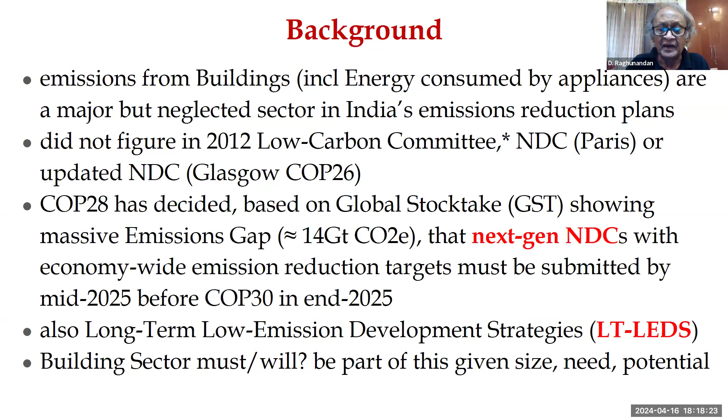But since we are required to now submit economy-wide emission targets, it's very likely that we are going to submit an expanded list of emission reduction targets next. And I can't see that we will be able to do that without taking the building sector on board, because buildings is a major part of the emissions profile of the country, which is currently about 25% of total emissions.

And this is in a context where roughly between 50 to 70% of building stock by 2050 is yet to be built. So more than double of the building stock today is still to come up. And we are already 25% of the total emissions in the building sector.

And I've given some figures here of emissions from buildings, which are largely drawn from C-STEP's study and their modeling, which essentially says that almost the entire carbon budget, that is the amount of carbon India has between now and 2050, the space in the atmosphere, will be used by the building sector alone. Or since it will not be, that means we'll exceed our carbon budget by a lot. And that's clearly not going to be allowed and will not be countenanced by the international community.

So when we talk about the building sector, I just want to emphasize that the building sector emissions consist of two parts. One are what are called embodied emissions. That is, emissions contained in materials that go into buildings, into cement, concrete, etc. And emissions which have gone into the construction industry, the transport of these materials, the removal of waste and the handling of waste and so on. These are called embodied emissions.

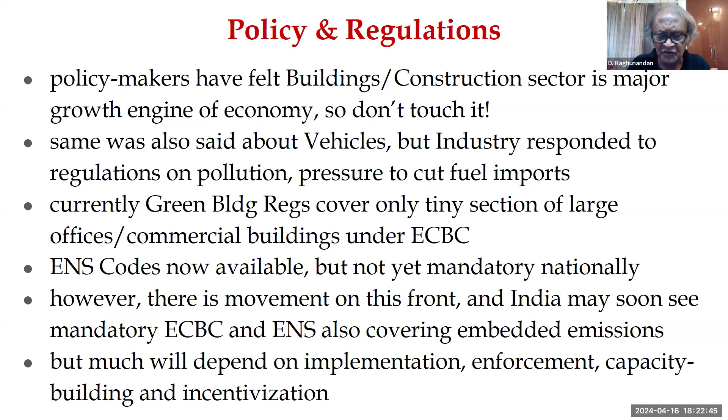Chitrakshi, yeah. So just a few questions I'll leave you with. Should energy efficient buildings also be included in India's next submission in our nationally determined contributions? Should ECBC and ENS be made mandatory? And if not, how do we go about implementing it and achieving the results that we want? What kind of policies, what kind of incentives can bring us the desired goals if we do not have mandates?

Third, which is a technical question for those among the experts who want to look at this, are there any changes that you would like to see in the ECBC codes or in the Eco Niwas Samhita codes? My next poser is perhaps a little more complex, but we have industry representatives here among us who could perhaps address this issue. Is the industry ready for this shift if this does come about?

Where do we stand with regard to that? And should this effort also involve the appliance manufacturers? Since we are talking about reducing the emissions from appliances, air conditioners, refrigerators, televisions, fans, etc., inside the building, should they not be part of this effort?

And the last two questions pertain to Chennai specifically. Is Chennai ready to implement the ECBC or Eco Niwas Samhita, given the fact that the Chennai Climate Action Plan has rather ambitious targets of addressing 40% of buildings, both retrofitted and new, by 2030, leading up to 60% in 2040 and going up to 100% later?

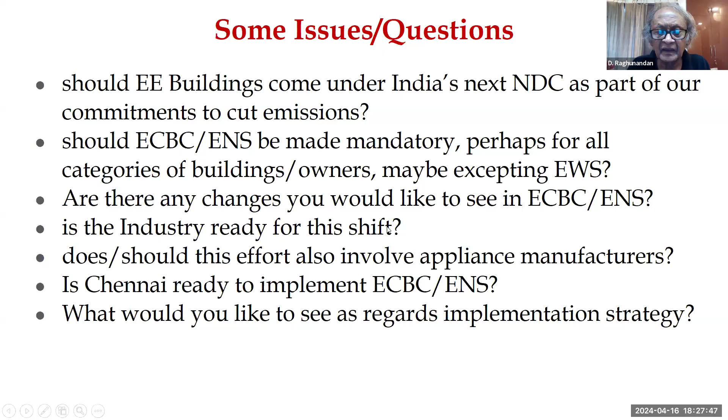Dr. Shivraj Dhaka has just joined us, so I'll ask him to make his presentation in maybe 15 plus minutes. Dr. Dhaka is part of CII and the Green Buildings Council in Chennai. Dr. Dhaka, please. Thank you very much for offering this opportunity to CII IGBC for this presentation on net zero energy buildings. I hope you are able to hear me. Yes, we are. Please go ahead.

Sir, I will share my screen so that I can also utilize some animations. Okay, then you can share it yourself. Chitrakshi, you can take down what you have uploaded and then he can do it himself. I think my screen is visible to all of you. Yes. Okay, let me also put on full screen mode. Just a second.

So this presentation is primarily about net zero energy buildings and built environment. I got a message from Raghunandan sir that I should cover several parts of net zero energy which make sense for Tamil Nadu or Chennai with regard to climate mitigation. I have tried to cover several points, but I don't think one can do justice in 10 minutes to cover every part of energy efficiency in buildings. But let me run the presentation. If you need any clarification, we can have a Q&A session.

The building you see here was the first green building in the country, and this is the headquarters of IGBC. When we started in 2001, this building was converted into green considering several measures. But in 2017-18, we realized there are many technologies and advancements available in the country, and this first green building was converted into a net zero energy building after a lot of retrofitting in the completely air conditioned system it had in 2001.

So this is the journey we have witnessed from green building to net zero energy building, and this presentation will showcase how it can become a story for every building, not only our office, but it can become a true message for every building with regard to green building to net zero.

So when we define the net zero energy building, we also defined how demand can be reduced. Even Dr. Raghunandan mentioned it could have some impact in Chennai or Tamil Nadu. So we cut down energy demand. Of course, it will have huge impact on the source energy. This means whatever energy we get from either solar or power plants, it could have a good replica downstream with regard to how energy demand can be cut down.

Then highest energy efficiency would have focus for every building during design as well as in operation. And after defining energy efficiency in every building, whatever is left out, this energy should come from renewable energy. So this is the definition IGBC has defined.

But if you see the Bureau of Energy Efficiency, which is the nodal agency for improving energy efficiency all across the country, for the building sector as well as the sectors in industry also.

Let me also turn it off, just a second.

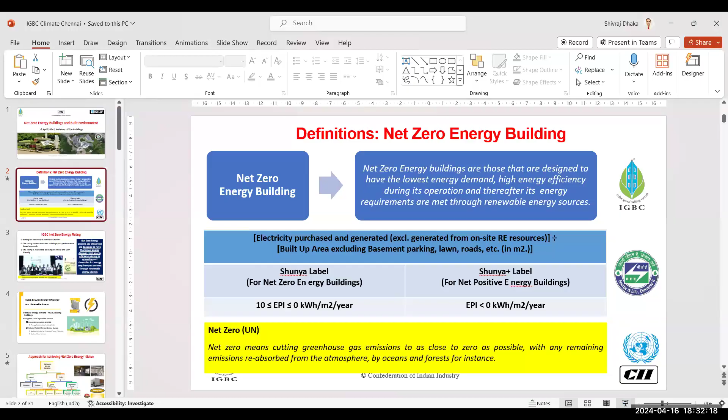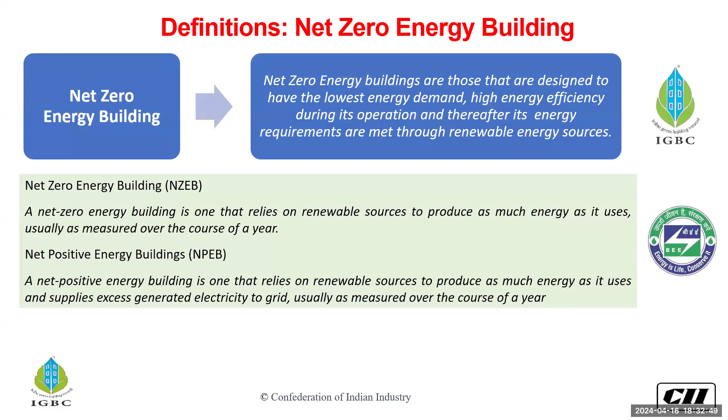With regard to IGBC and the Bureau of Energy Efficiency, we also give huge importance to energy efficiency and renewables. The Bureau of Energy Efficiency has defined what building can be called net zero, like the Shunya label for net zero buildings, and their energy performance index. Energy performance index is very simple. We take the total energy consumption for a given building and divide by the total built-up area for our home or commercial building. This should be less than 10 for commercial buildings, and for residential buildings it could be a little less than 10.

With regard to Shunya label plus, or net positive energy buildings, this EPI would be less than zero. This means whatever renewable energy we generate will completely offset the energy demand, but also generate a little more than our requirement. You can also find many other definitions. This is listed from the United Nations, but the UN doesn't talk about net zero energy. They talk about total carbon offsetting by any source of energy users.

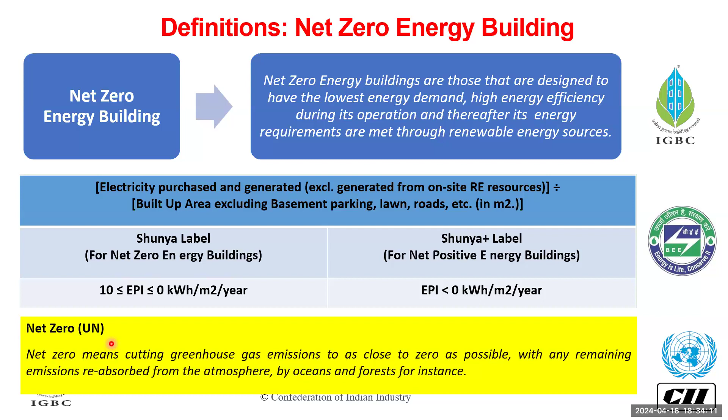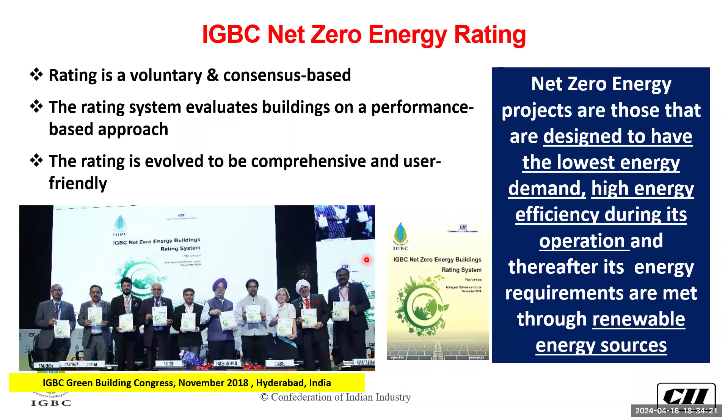So this presentation would be shared with the team so they can circulate it with all the stakeholders. This net zero energy rating was launched in 2018, and today we have many projects all across the country. I will also showcase some case studies during my presentation.

So when we defined net zero energy, our thought process was that it should also address several policies in the country. Primarily, when we talk about net zero energy, we are also talking about energy efficiency and renewables. Energy efficiency is well defined under the Energy Conservation Act 2001. Later on, ECBC, the Energy Conservation Building Code, was developed in 2007. 2017 was the first revision.

I'm happy to mention that ECBC has now been further updated and is called the Energy Conservation and Sustainability Building Code, ECSBC. ECSBC will not only address energy, it will also address water, building materials, indoor environment quality, commissioning of equipment, and how sustainability can be achieved through site selection and planning. So all these parts of green building will also be part of the ECSBC, which will be revised very soon by the Government of India.

The second part is it addresses climate policies on energy efficiency as well as renewable energy. So while adopting net zero energy, we are really confident about having huge benefits with regard to energy savings and more and more penetration of renewable sources in every building typology.

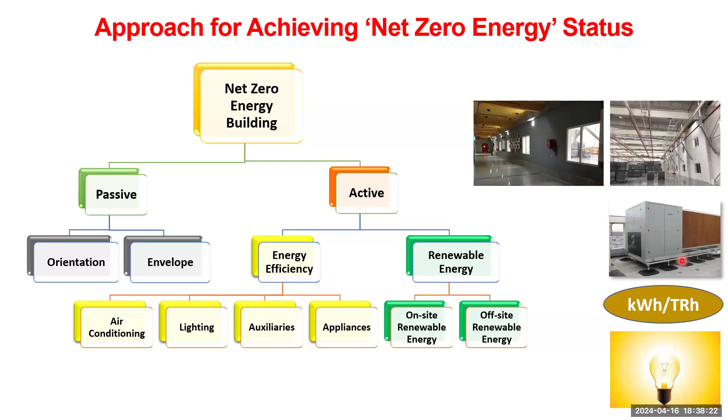So when we have a net zero energy certification, we consider several parts, and passive is by default integrated for new buildings, but primarily when we see the building growth, even Dr. Raghunandan mentioned what could be the strategy for 2050. So today we have fewer new buildings and many more existing buildings. So there could be huge retrofitting opportunities for these buildings to become and demonstrate net zero energy.

So we give more than 75% of weightage to energy efficiency alone, because energy efficiency pays back from day one. And then we also try to fit which retrofitting options can be better for the project. I have showcased something here. Many a time, old buildings do have centrifugal fans. And today, most of the air distribution systems wouldn't have a centrifugal fan.

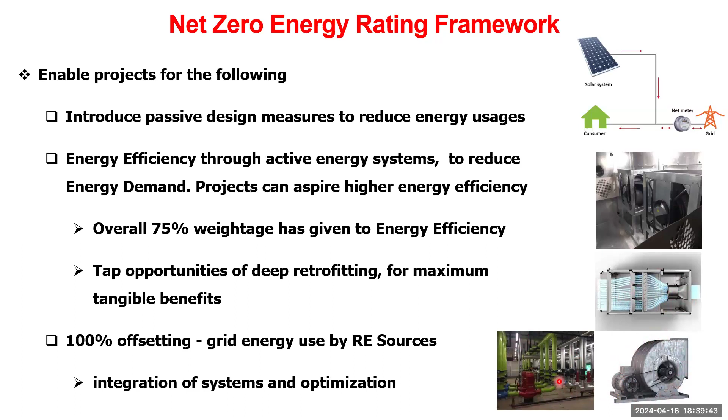Let me tell you how energy efficiency happens, which has the highest weightage in net zero energy. Some of the buildings we have rated had a very high energy performance index in 2010. They did gradual improvements. Slowly they had many retrofits, and today their energy performance index is less than a triple digit, which is like 90 kilowatt-hour per square metre per year or less.

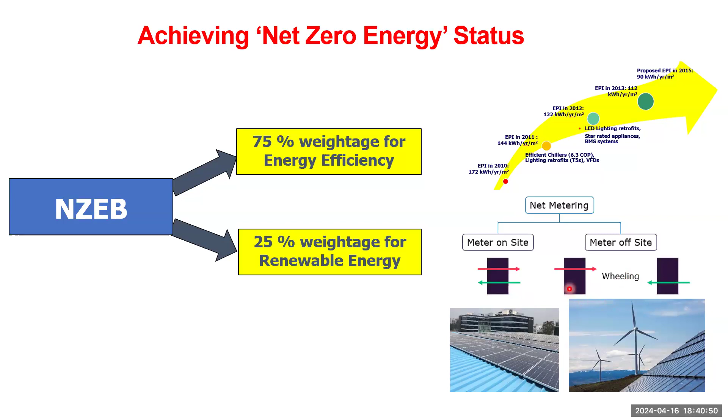Another message we would like to give you is that for renewable sources, it is not only 25% weightage; renewable energy is 25% of the overall 100-point scale. But a project must offset 100% of the grid energy used with renewables. It can be on-site, having net metering policies. Tamil Nadu is a good state with regard to solar policies. And second, if energy demand is so huge it cannot be met on-site, it can also be off-site by having wheeling.

This is ECBC, which defines the compliance route, like building envelope, comfort systems, lighting, and electrical and renewable systems. These have a compliance route with regard to mandatory conditions, and if mandatory conditions are met and the project has more energy efficiency, they can also demonstrate it through the energy performance index, which I will discuss in coming slides.

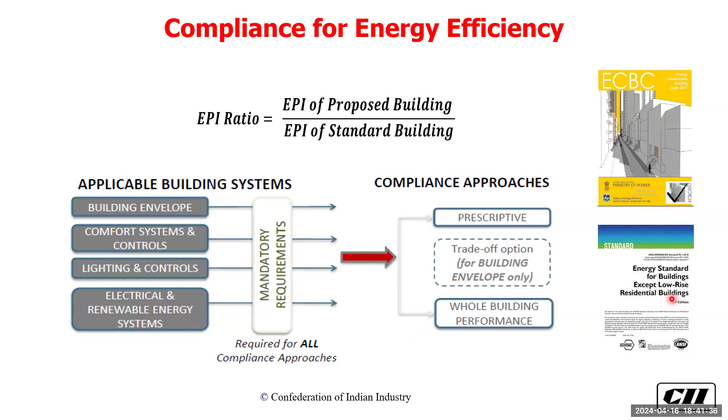Some projects that are really interested to cross some milestone beyond ECBC can also refer ASHRAE 90.1. Some of the latest versions, like 2022 or so, define really ambitious goals for energy efficiency.

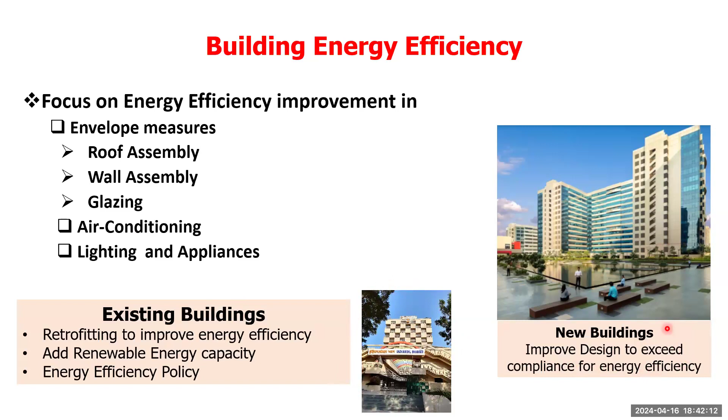So when we talk about energy efficiency, of course, there are parts like roof, wall, glass, and then air conditioning, lighting. But the key thing is when we have more existing buildings, there would be more energy efficiency implementation opportunities through retrofitting, and also to add capacity of renewable sources there. When we compare new buildings, obviously there would be more design interventions there, and these buildings also showcase how they are better compared to new buildings which are not meeting the code compliance.

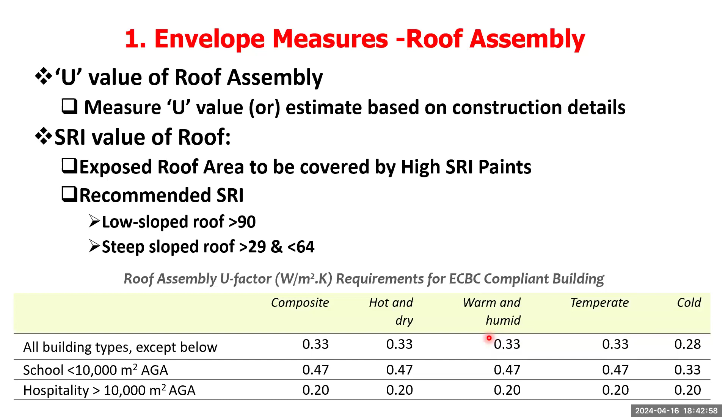So these are the envelope assembly values with regard to overall heat transfer coefficient. These values are defined there, but Chennai comes under warm and humid climate. So it is suggested to use some of the walling assemblies, some of the material which can reduce the overall heat transfer coefficient, or in very simple language, we should provide a wall which has an optimum level of insulation, and this insulation can be created by many different options. Sometimes you don't need to use insulation, it can be an air cavity. Sometimes an air cavity can be combined with some different type of insulation material which are well known in every climatic zone or city.

This is air conditioning. Air conditioning plays a very important role because in every commercial building, and in every residential building as well, it consumes most of the energy. It is said most of the time it consumes more than 50 to 55% of energy in every commercial building. And in the recent trend, it is really high in residential buildings also. These are the performance levels defined for air conditioning efficiencies in commercial buildings.

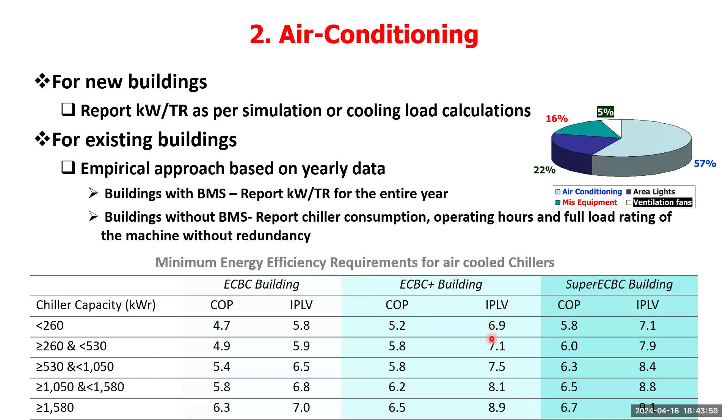So we have three approaches. One approach is called ECBC, which is mandatory for every building type. And while going for ECBC, either you follow the COP or you follow the IPLV. IPLV stands for Integrated Part Load Value. Most of the time we design for worst conditions, but the worst doesn't come every time. So we should design buildings for part load efficiencies also, so that we get more benefit from the cooling savings.

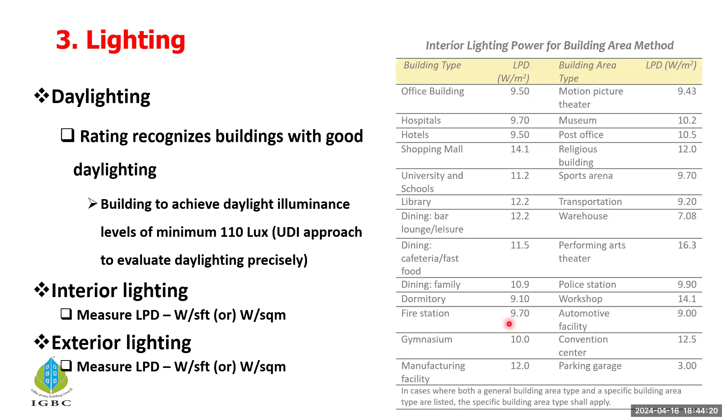Another part is lighting. Lighting is important because every space needs either artificial light or daylight or a combination of both. So we recommend lighting power density, which is defined for different building typologies in ECBC. It is available online for everyone to refer.

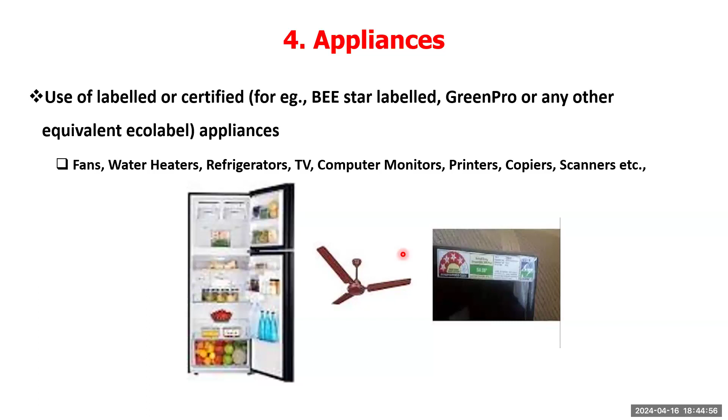These are the appliances I just mentioned. There are more than 21 appliances from the Bureau of Energy Efficiency, rated for every OEM in the market. But the main advantage of using appliances with a star label is that every two years these labels are upgraded, so whatever you purchased as 5 star about 2 years back wouldn't qualify for 5 star now. It would become either 2 star, 3 star, or may not qualify the criteria developed by the Bureau of Energy Efficiency.

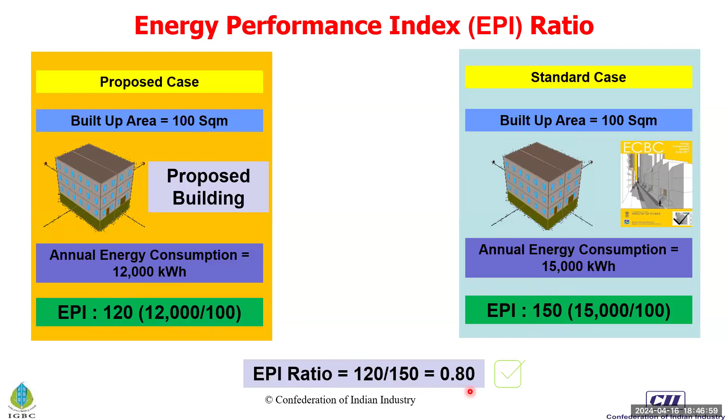So this building can't meet the ECBC compliance. Here is the case which is a little reverse to the case which we have discussed now. It has more energy performance index in the standard case, which is like the ECBC case, than the actual case which we will have now. So 120 divided by 150, your building is having EPI ratio lesser than 1. This means this kind of building can meet the ECBC compliance.

Now let us talk about on-site, off-site energies. I think I have to run a little fast because I'm taking more time.

So on-site, this is one example which can have net metering and gross metering based on the policies which the state has. But I don't think Tamil Nadu has any problems. It is very good with regard to policies for net zero or renewable implementations. This is offsite. A project can put a plant outside their premises. They can have wheeling through the discom or any of the renewable energy companies and can wheel the power, which is green power, to offset the grid energy consumption.

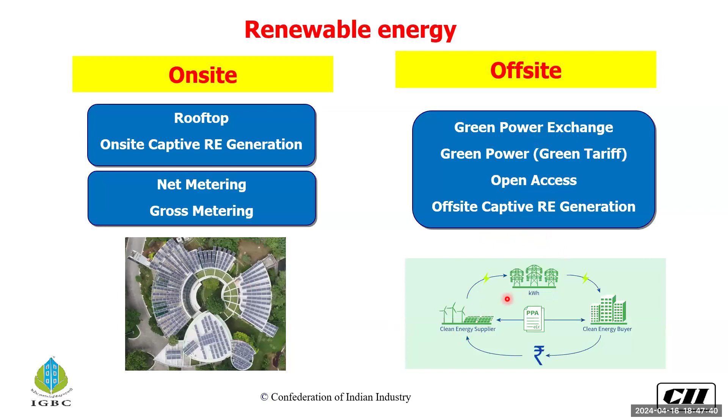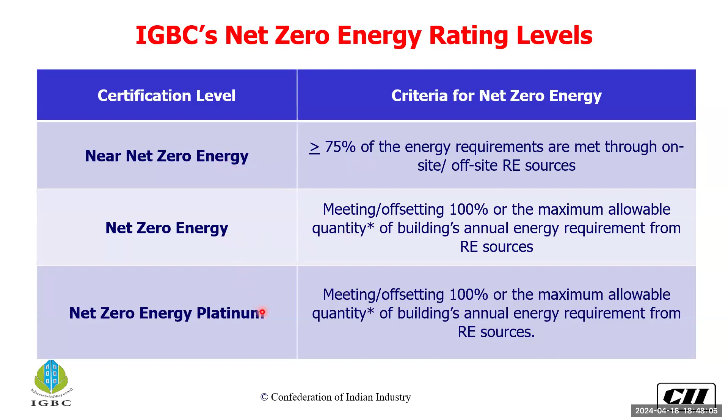So we have three thresholds defined for net zero energy. One is for any building which is having 75% of the energy requirement met through on-site and off-site renewable energy. This building would be called a near net zero building. Any building which is offsetting 100% is called net zero energy, and net zero platinum means it offsets a little more than the actual requirement on an annual basis. This is the case of our building.

Dr. Dhaka, could you please try and wind up in the next 3-4 minutes? Absolutely, sir. Thank you.

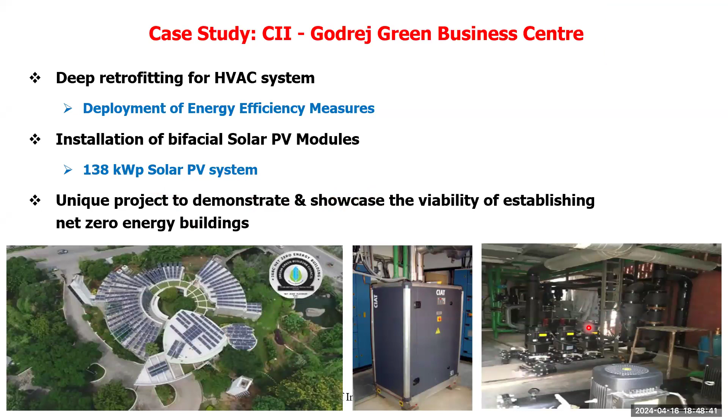So this is the case of our office. You can see all the cooling systems we have retrofitted with new ones, which are very efficient. But efficiency at 100% load is not really important for us, because our office is never operated at 100% load. It mostly runs at 50-60% load or a little lesser than that. So we selected items which are best at part load.

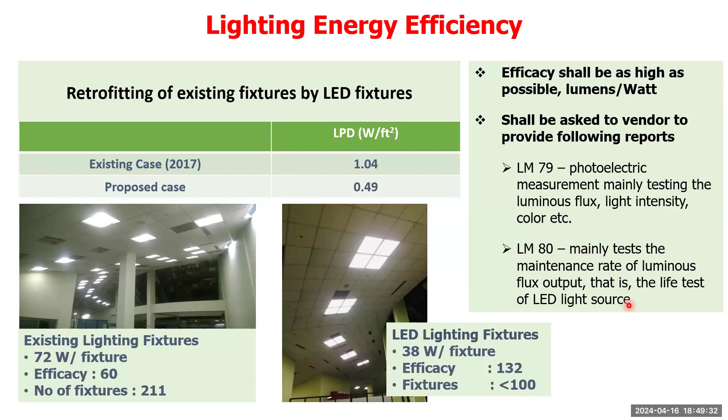Let me also remind you one more thing. Whenever we procure lights, they shall be tested for LM79 and LM80, which gives a guarantee for the life of the LED source, which means it will burn for more than 45,000 to 50,000 burning hours, and also the quality of the light. It should not happen that it will blur, or it will not last more than 1 year, 2 years or so.

This is how we did retrofitting. The temperature of the light was more than 50 degrees in the case of CFL. In the case of LED, it was less than 29 degrees. So this also gives saving on cooling. So lighting not only saves energy for lighting fixtures, but it also saves on cooling.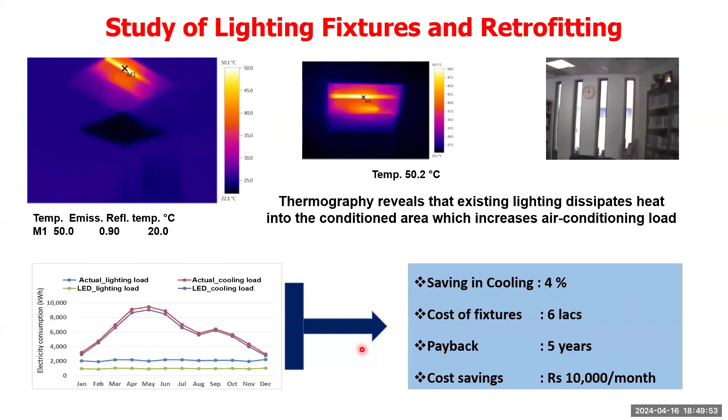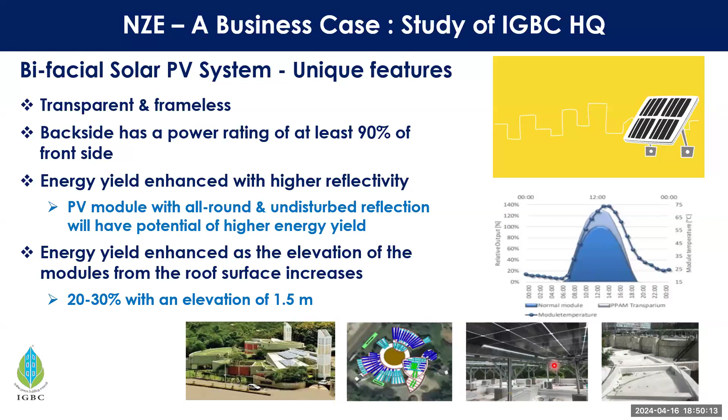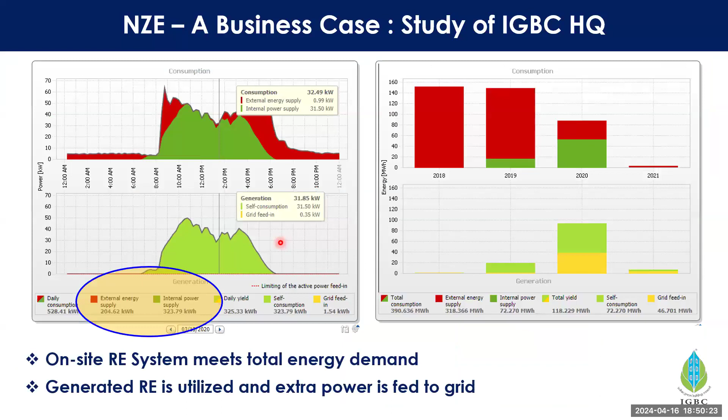These are the bifacial panels we have put here. You can just see it. This is the rooftop, which has white color. This white color will have diffuse radiation, and this also falls back on the rear side of the cell, so that the cell generates energy from the top side as well as the rear side. This is a good BMS, building management system, which will also ensure good saving and a good control mechanism for a given system. And this is the performance of our building with regard to net zero energy.

This is Bhawar House which is located in Chennai. It is a true net zero energy building in design. I hope it is now completed and would be up and running maybe in a couple of months. This building is truly net zero energy platinum. If you want, you can visit, and you can also contact us in case you find any difficulty there.

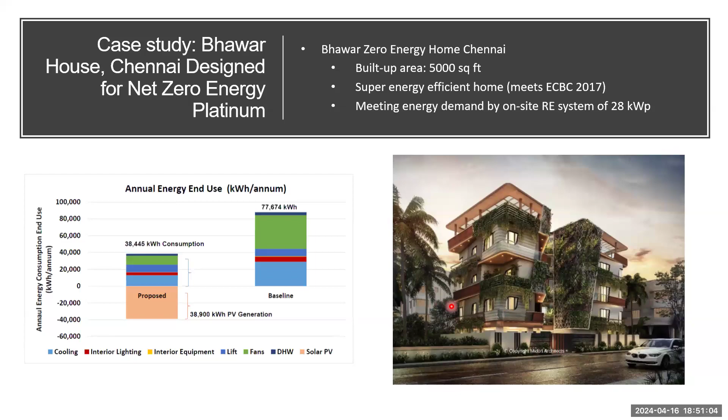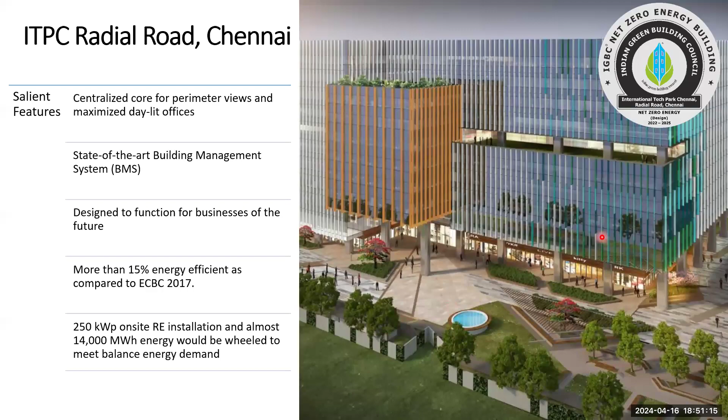This is again a project from ITPC, Radial Road, Chennai, which is also net zero energy. They have done huge energy efficiency, then renewable energy on site, and the remaining comes from off site.

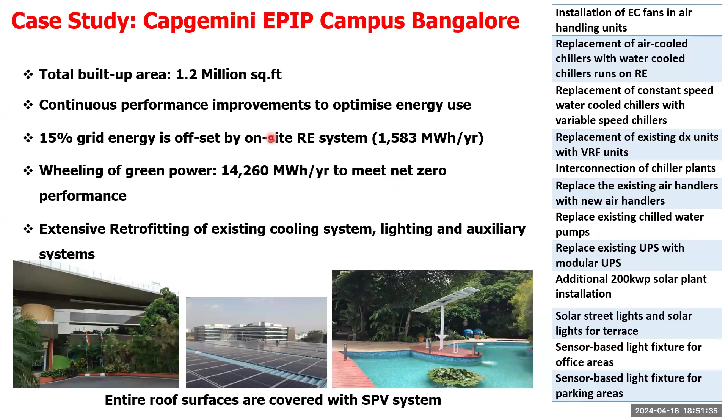This is the energy of a very large campus in Bangalore, which has more than 10 to 12 buildings in one site, and again huge energy efficiency. They have invested more than 21 crore rupees to retrofit several items there and try to improve the energy efficiency. The rest of the energy comes from on-site and off-site sources.

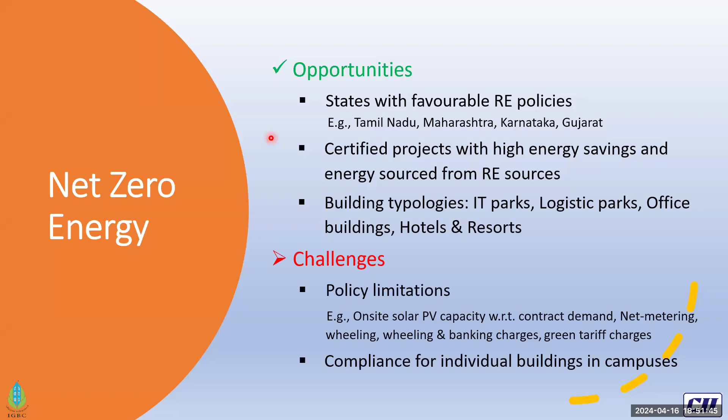So there are many good things in Tamil Nadu, but many more things can happen through adoption of net zero energy. So this was the presentation about net zero energy. If you have any doubt or clarification, I would be really happy to help.

Thank you, sir. I hope I took a little more time, I'm sorry. Not at all. Thank you very much. Even though you're traveling, if we have some questions that you need to answer, we'll come back to you later. Absolutely, contact me over the phone. No problem. Yeah.

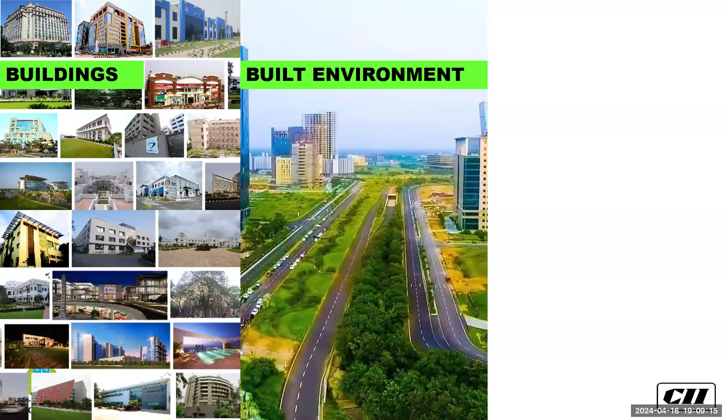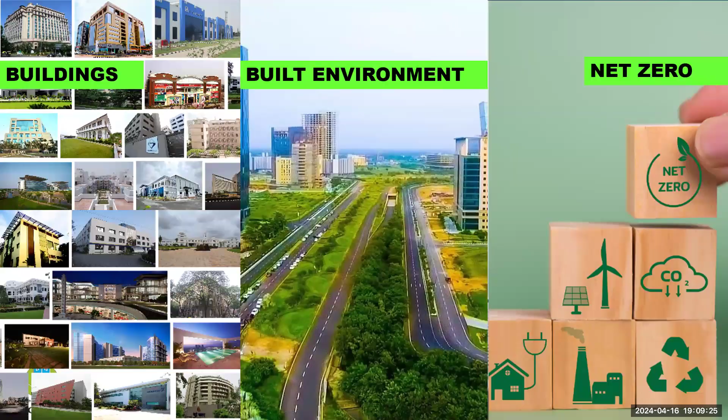We started working on buildings, we moved on to built environment. And then we realized that we need to work on net zero buildings. And that's how we started focusing on net zero buildings, with a mission mode. And I'm glad to share that with our own center being the first platinum rated building and net zero energy building, now we have more than 13,000 green building projects with about 11 billion square feet.

But the message from this slide is we started working exclusively on net zero projects, and I'm glad to share that we have 100 plus projects which are working exclusively on net zero. This number appears to be small, but we are getting many queries. A couple of years back, we used to get hardly a query on net zero. But today we get more than 5 to 6 queries on net zero projects, which is good.

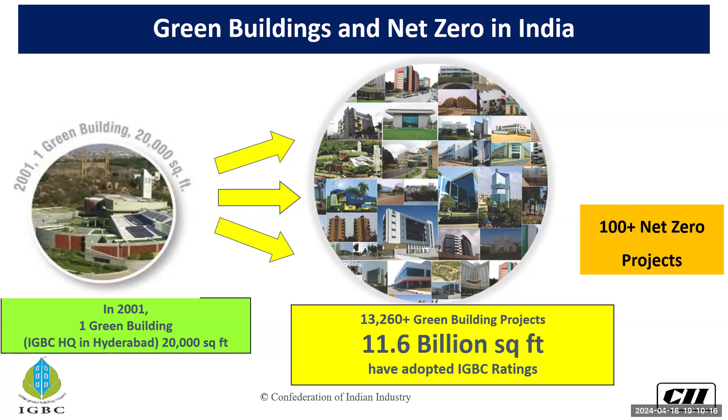We're trying to understand what are the challenges, opportunities, what are the policy changes which we are looking for from different states or central government. All of this is helping us to work toward net zero. And then IGBC has launched a mission on net zero. What we thought is we should facilitate the net zero movement in a holistic way.

And in the year 2021, on Earth Day, April 22nd, we launched IGBC's mission on net zero with a vision to facilitate India to become one of the foremost countries in transforming to net zero by 2050. We're working on net zero buildings in all aspects, that is energy, water, waste, and carbon.

And when we launched this, over a period of time, we had a commitment from over 350 organizations to achieve net zero status for their new and existing buildings. Of course, many of these organizations are yet to demonstrate their buildings as net zero, but they made a commitment that they will start now, and sooner or later they'll become net zero.

And as mentioned earlier, we have launched exclusive rating tools for net zero energy, net zero water, net zero waste, and net zero carbon. For a period of 5 years, we took feedback from industry leaders, experts, projects, consultants, manufacturers, academicians on different subjects. And then we developed these rating tools slowly over 5 years with the intent that the industry should look at energy, water, waste, and carbon.

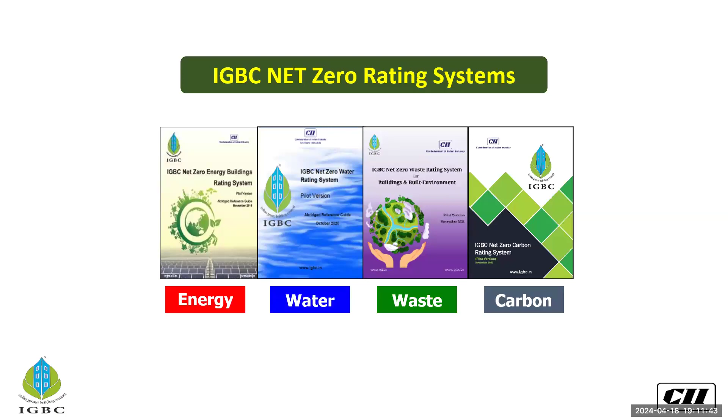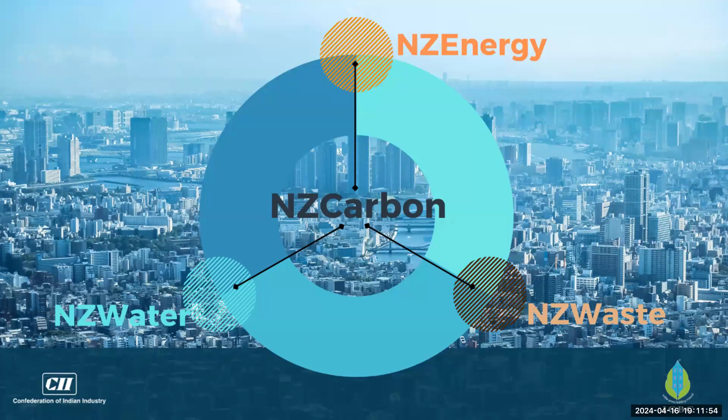And of course, carbon we're looking at in a holistic way, because it's not just energy which will reduce the carbon emissions. There's a nexus between energy, water, and waste. And that's what we're trying to focus on with net zero carbon. But today, I would focus on water. And of course, water is directly linked with energy. That means the more water we use, the more the energy consumption, and the more energy consumption leads to higher carbon emissions.

So what is it that we are trying to look at? What is the approach and methodology we have for projects, how they can look at net zero water? And particularly Chennai is very unique: we have seen floods where we have a lot of water, and at the same time, we have water crisis in Chennai. So it's a very unique scenario, particularly in Chennai and other parts of Tamil Nadu. Let me share some of those concepts which can be considered by the projects.

So for net zero water, for any net zero rating we developed, the first thing we looked at is the definition, because that's how we define how we can address the projects from net zero. So we have defined net zero water, based on the consensus and views received from industry leaders and experts: net zero projects are those that consume minimum raw water, and I've underlined the important things here, and produce alternate water to meet the balance requirement.

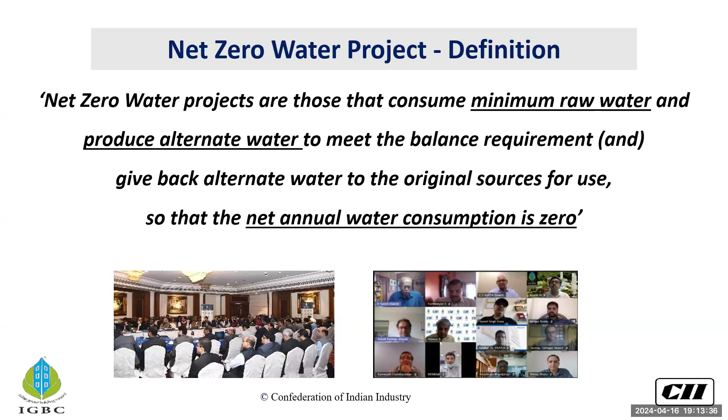That means we use minimum water and produce alternate water to meet the balance requirement, and then give back alternate water to original sources for use, so that the net annual water consumption is zero. The definition might be complex. I'll try to simplify this. In a nutshell, what we're trying to say is we have to know what is our total water consumption.

And then we have to know what is the alternate water which is being used or harvested, so as to figure out what is the raw water consumption. So for this, first of all, the foremost thing is, similar to energy meters, we need water meters. And this is one of the biggest challenges we have when we ask projects, do you know the water consumption for each of the applications?

For example, do you know how much raw water is used, how much treated water is used, or how much water is used for cooling towers or flushing or landscaping or any other major applications? The answer is, yeah, we know the total water, but we don't know the breakup. So what I'm trying to say is, unless we measure what is being used, we can't enhance the performance.

So we have classified what is raw water and alternate water, so that projects know very clearly this is how we can look at it. So a combination of raw water and alternate water gives us the total water consumption. So the raw water, which we typically know, is municipal water. Even borewell water, if it is not potable, we still consider as raw water because it is taken from the

Mother Earth. And then, of course, the other raw water is tanker water, which is being purchased, particularly in these months of summer, and it is in huge demand. And we are seeing the news day in, day out in different cities like Bangalore, Chennai, Hyderabad, and many other cities. And alternate water is rainwater which is harvested, that is the stored water, or the treated grey water.

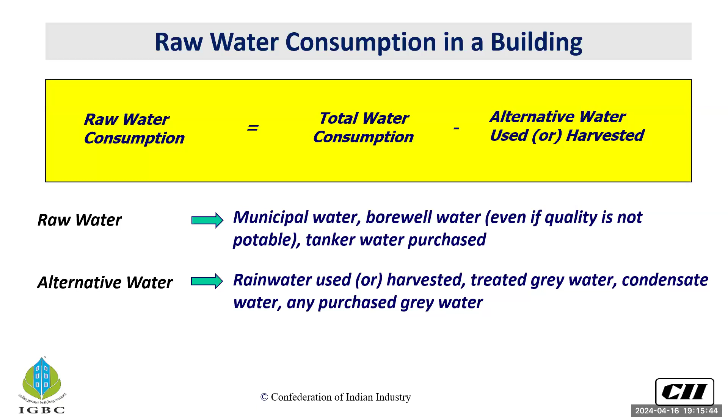And some of the projects where cooling towers are used for HVAC makeup, where we have the condensate water, or even from the AHUs, which are used even if air cooled, and any purchased grey water. Some of the authorities sell the treated water for projects to use, not only for construction, but for the building use, the regular operations as well.

What is water performance ratio? My colleague Shivraj explained about energy performance index, which is like energy performance ratio, or water performance ratio. So what we are defining as water performance ratio is alternate water consumption to total water consumption. We have understood what is alternate water. So we're trying to come up with the ratio of alternate water to total water.

So once we know this, we may be at some number which is maybe 0.5, 0.6, 0.7, but we need to know where we are so that we can take measures to enhance the water performance ratio. The water performance ratio should be higher the better. So how we can enhance the water performance ratio is by reducing the water demand, like how we were talking about energy demand, and by harnessing alternate water.

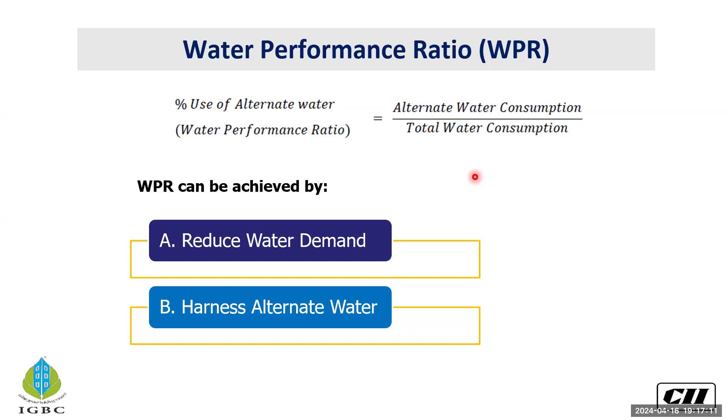So let me give a very high level overview of how we can reduce water demand. The first and foremost is having a water management system. We all heard about energy management systems, but there's a lot of demand for water management systems now. So these water management systems are a dashboard wherein we have the digital water meters, and every second, every minute

we get the data from these meters for different applications within the buildings or within the campuses to figure out what is the water consumption for different applications and what is the total water consumption, and for what applications in which buildings, everything we will get to know. So the water is monitored every minute. So we know where we are with respect to the benchmarks.

And then water efficient fixtures. This is the most important thing. Unless we have efficient water fixtures, we can't reduce the water consumption. We have heard many projects saying we have a lot of treated water, so we are not worried about using water. But even if you have excess treated water, we need to conserve water, and the excess treated water can be donated or supplied for other buildings or other applications, so that overall water demand can be reduced.

So having water efficient fixtures for different applications, like we have conventional urinals, we can retrofit with sensor-based urinals, or urinals with efficient aerators, or waterless urinals, so that we are avoiding the water completely. Instead of using single flush systems, we can go with dual flush systems. We have even seen projects that use a single flush system with 10 liters of water, wherein we can go with a standard 6x3, which is available, or we can look at 5x3 flush systems.

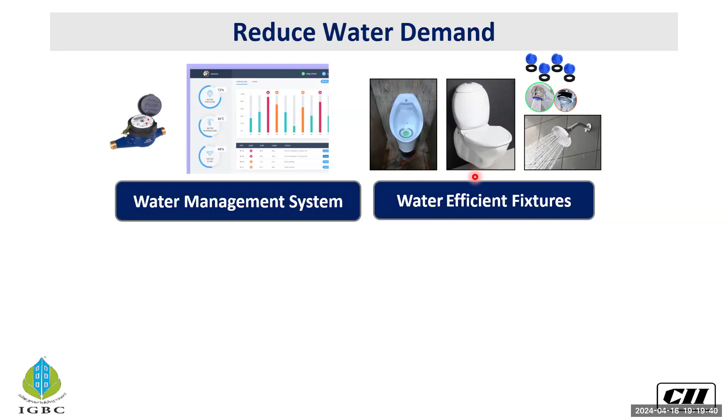Of course, for health faucets and shower heads we have seen 10 to 15 liters, which can be reduced to as low as 6 to 8 liters. So there are different ways and means to reduce the water consumption through water efficient fixtures. That's what we are trying to say.

And then water efficient landscape and irrigation systems. We have seen several projects where they have beautiful landscapes, but they are water guzzlers. They consume huge quantities of water every day, particularly in the summers. So first, we have to choose the plants which consume less water, and we call them drought tolerant species or native species, or we have xeriscaping, which means the water consumption by these plants is very minimal. On top of it, if we can add irrigation systems like sprinklers, drip irrigation systems, timer-based controls, pressure regulating valves, moisture sensor controls, this will further reduce the water demand.

So in a nutshell, what we're trying to say is we have to have different strategies to reduce the water demand so that overall water consumption in the project is reduced. Assuming a project is consuming 10,000 liters of water per day, what can we do to reduce the 10,000 liters of water per day, say to 8,000 liters or 6,000 liters? That's the first thing which we need to look at.

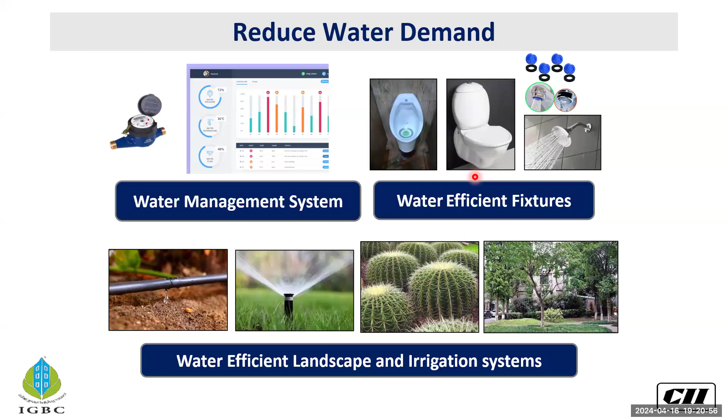And then whatever wastewater is being generated: if a building consumes, say, 10,000 liters of water, and assuming there are some losses, say 9,000 or 9,500 liters of water is going into the wastewater treatment plant, excluding the water which is used for drinking and landscape applications. So how can we treat this water efficiently?

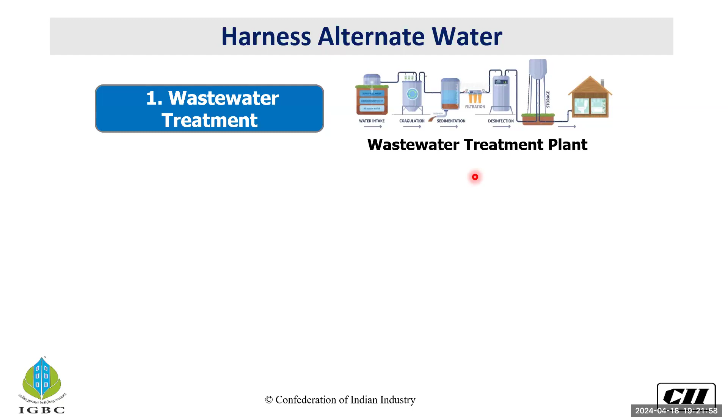We have seen several projects. One, they have STPs which don't operate, or they have STPs which operate at about 25 to 40% efficiency, or at max 50% efficiency. What can we do to improve the performance of these wastewater treatment plants so that 70 to 90% of water is treated, and that water is again reused for different applications? So the water should be treated to tertiary standards or secondary level. For example, secondary level can be used for landscaping as it is, but tertiary we can use for flushing and cooling tower also, so that overall water demand can be reduced.

And then storage of rainwater. We have seen several projects again, they have very minimal storage capacities, or they don't have storage capacities at all. But we recommend whatever is possible. We're not trying to say harvest complete water, but whatever can be reused for that particular day or the next day, those quantities of water can be stored.

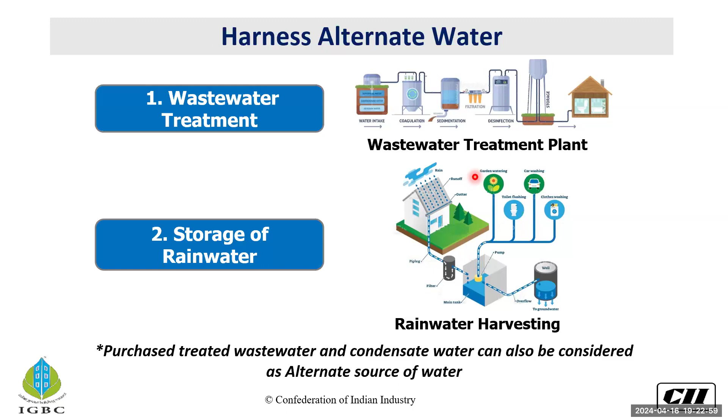Because in fact, unlike energy, water is not priced the same way. But the moment water is priced, probably the emphasis will be more towards water. When we look at the math with respect to the water being supplied by the municipality, which is bare minimum cost, vis-a-vis the tanker cost, or when there's no availability of water, that's when we value the water. So the storage of water plays a big role even when there's rainfall. That water which is being stored can be used on the alternate days.

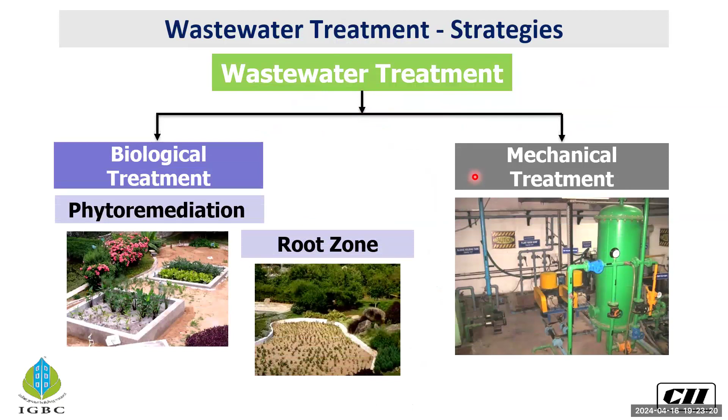So wastewater can be looked at in different ways. We have the conventional ways of biological treatment, phytoremediation, root zone. I won't go into details, but these are natural ways of treatment where we use the plants to treat the water. And then we have high-end mechanical systems where the water can be treated to 90 to 95% efficiency as well.

And rainwater harvesting, we know these measures, we can collect water in a pond, even in campuses, or storage tanks, even in a residential building or a residential bungalow. And then percolating water to the ground. I mean, this is something which is done very, very well in most of the projects. And in some of the projects, we have a pit, that's it.

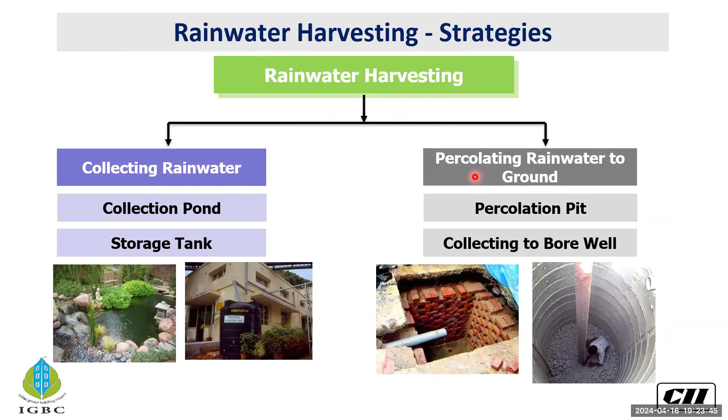So let me explain here water back to source. We discussed a while ago about rainwater harvesting, where recharging is one of the strategies. So recharging can be done. And if you have excess water on a daily basis, particularly say residential communities, they use more of the raw water for daily use, domestic water, and they have excess water which may not be used for reuse like flushing or landscaping. That excess water can be donated, or it can be even sold to others who require this water on a daily basis. It can be preferably through a piped connection, or if possible through tankers, because there's no alternative way to divert water as of now.

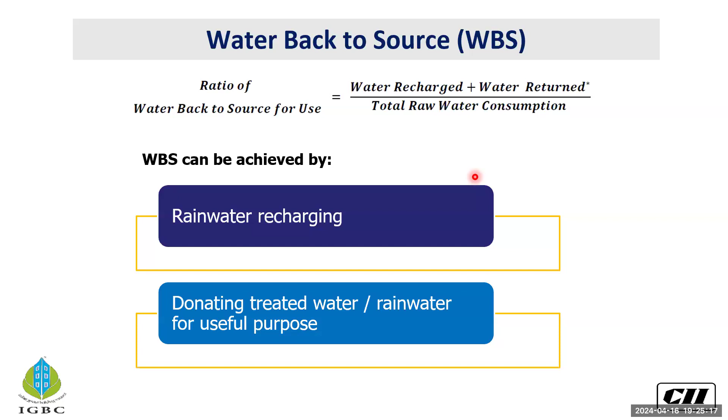But we need the infrastructure from the municipalities to supply this treated water to all the buildings, whether it is commercial, residential or industrial buildings. Even donating this water for a useful purpose can be considered water back to source. So coming back, the near net zero, and net positive. We were discussing about water performance ratio and water back to source.

So we have put some numbers based on the feedback we received from the projects and our own analysis. So if the projects have a water performance ratio of 0.75 or higher, that's when we can start looking at net zero, near net zero, or water back to source of minimum 0.75, in case they're not looking at water performance ratio. So we have some numbers here.

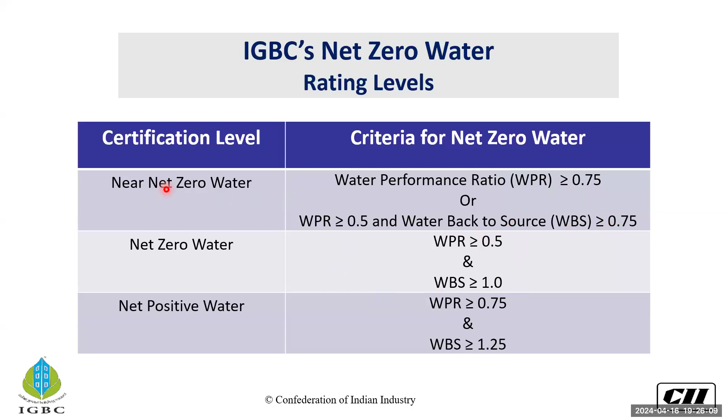I mean, I'm not trying to focus much on the numbers, but there's a strategy to look at in terms of water performance ratio and water back to source, so that we can achieve near net zero and net positive projects. And we have several projects now taking this challenge to become near net zero or net zero, and very, very few projects with net positive.

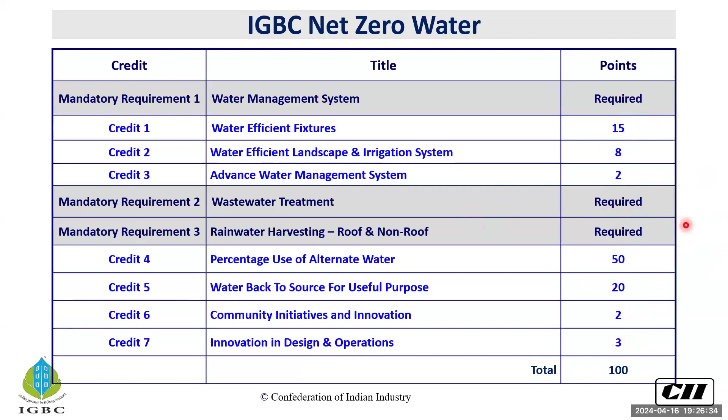So we have come up with a checklist. I will not get into the details, but the message from these slides is it's not like one strategy applies to become net zero. There are several measures to be considered, and we have put in weightage for these measures on a scale of 100, so that the projects can look at all of these measures and see how they can look at net zero water for their projects.

So let me quickly share a couple of case studies so that you can understand how projects are looking at this. This project, which is Sobha in Thrissur, is the first project which we have certified as net water positive. Of course, it is one of a case. This project is in the state of Kerala, where there is abundant rainfall. But taking that into account, the project has made a man-made lake to harvest the rainwater, and they made a lake of about 6.5 lakh liters of water, which will shrink whenever there's no water, and fill up when there's a lot of water.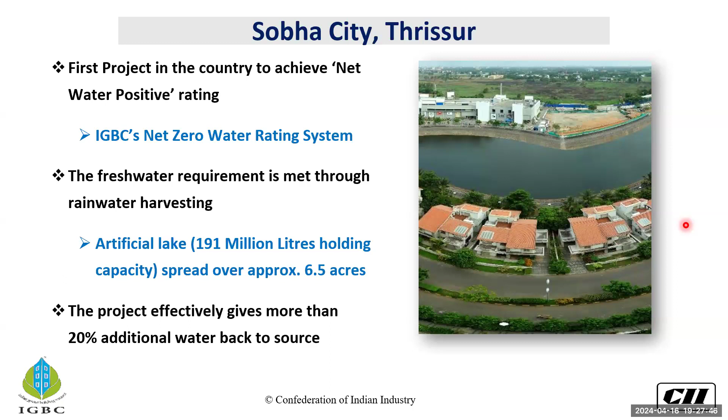So they are holding about 191 million liters of water. I mean, this project would have thought, we can make some other units and make more money. But they had an opportunity to make a huge water body which can harvest the water. That water is being supplied to the dwelling units and further applications. And in fact, this project effectively is giving 20% additional water back to source, in addition to the water they have already consumed. So that made the project become net positive. And another project in Chennai, which is a Radial IT Park, which my colleague already mentioned from an energy perspective.

This project is very unique because they achieved net zero water for design, but the same project had applied for the new building rating for platinum. And they got decent infrastructure from a water perspective. But when they started looking at net zero water, the perspective changed, because the criteria we were looking at was far more stringent for the project to comply.

Say, for instance, they had only 14 pits earlier, and they had half the size of the pits. We had to make them increase the size of pits and also increase the number of pits to 28. And now they can harvest about 15,000 cubic meters of water annually. And then they have an STP which was working for the project, which is platinum rated and net zero.

But again, the difference was the storage tank. There was about 250 cubic meters, but they had to increase to 1,000 cubic meters so as to store the water and reuse it in the building. So what we are trying to say from this is, conventional projects and net zero water projects have to be looked at from a different perspective.

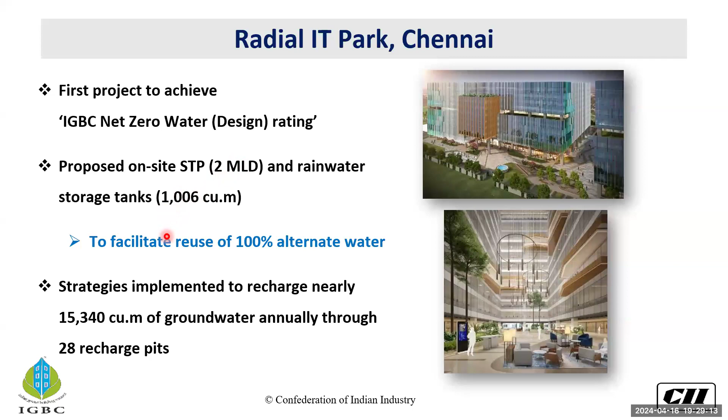So there are quite a lot of organizations which have taken up this challenge. They have taken pilot projects on energy, water, waste, or even carbon now, including L&T, based in Chennai, the headquarters for L&T Construction. The message is, some may look at priority as energy, some may look at water, some may look at waste to landfill or carbon, but somewhere we need to start. So what is relevant and applicable can be taken into consideration.

Certain projects can't take up net zero water because they have limitations in site conditions or the local infrastructure. Or say energy: even if they want to become net zero energy, the local policies may not favor it. Or if they want to become net zero waste to landfill, they are doing very good, but they don't have recyclers who can take and process the waste. So we can look at what is more realistic and then look at how we can become net zero energy, water or waste.

So to sum up, this is an excellent opportunity to demonstrate leadership in net zero for everyone, but we need to start somewhere so that we can benchmark and make others embrace net zero concepts. There's a clear demonstration of operational cost savings. Green makes business sense, but net zero makes all the more business sense for the projects. And more importantly, whoever is embarking on the net zero journey will contribute to India's commitment to become net zero by 2070.

Now, in our ClimACT project, we have conducted a fairly intensive study of what is going on in Chennai. May I ask my colleague Chitrakshi to please share my presentation, the last one. I'd like to share with you some of the work that we have done on this particular aspect.

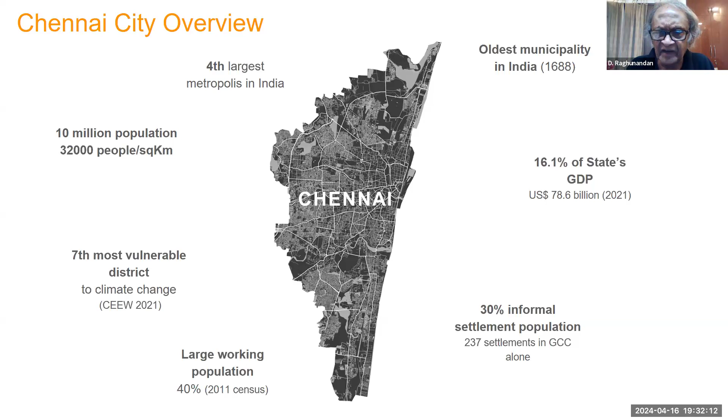I am stepping in because our researcher who worked on the buildings sector, Sai Varshini, has left for higher studies in Germany. Since I was helping steer the project in all the sectors, I thought I could do the presentation on our behalf, because the others on our project were not feeling confident in the sector, not having worked on it. So I'll make this presentation fairly quickly. Next, please. We don't need this.

So this is basically what we have done in our study, which we call the approach paper to climate action. That's available on our website; you can see the address below. We have looked at the existing context, climate change impacts, adaptation, resilience, and emissions reduction potential across different sectors. We've also taken into account the Chennai Corporation's climate action plan and looked at possible gaps and improvements, which we have then responded to in our study.

A unique aspect of our study is that for each of the sectors we have looked at, the perspective we have adopted is to look at co-benefits. That is to say, you aim, for example, at reducing energy, but it also helps you save water. It also helps you reduce pollution. It also helps to reduce heat in the city, etc. So in each of the sectors we are looking at co-benefits, both within mitigation and adaptation or across mitigation and adaptation.

And I'd just like to say, for those who are likely to read this from our website, this is the first iteration, and we hope to continue and improve this through interaction with other stakeholders. Next, please.

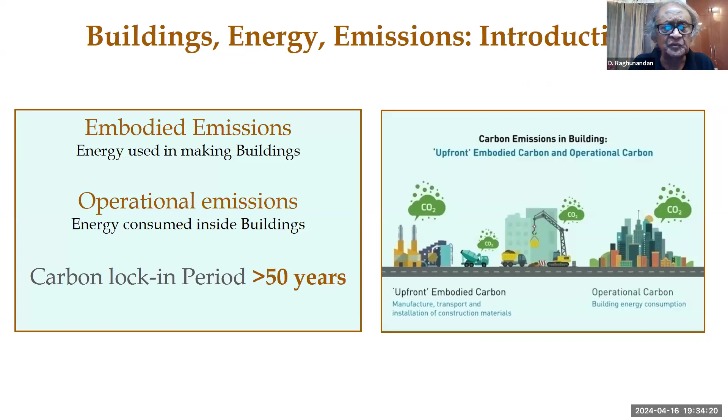So we know that the building itself is a problem, apart from the fittings and the appliances inside it. And we've heard about how different materials, different designs of the envelope, etc., need to be done. A simple observation of today's buildings is that we seem to go in the opposite direction to where we should be going. We use a lot of glass where we don't need it, where it only traps heat, etc. So that's one part of it.

The other part of it is the electricity usage inside buildings. Earlier, the Eco Niwas Samhita norms and codes were not introduced because it was thought that residential buildings are not such a big sector. But newer data seems to suggest that residential buildings may be consuming about 75% of total energy consumed in buildings. And that has refocused attention on the residential sector, which we haven't heard much of today. So I'd like to focus a little bit on that. Next, please.

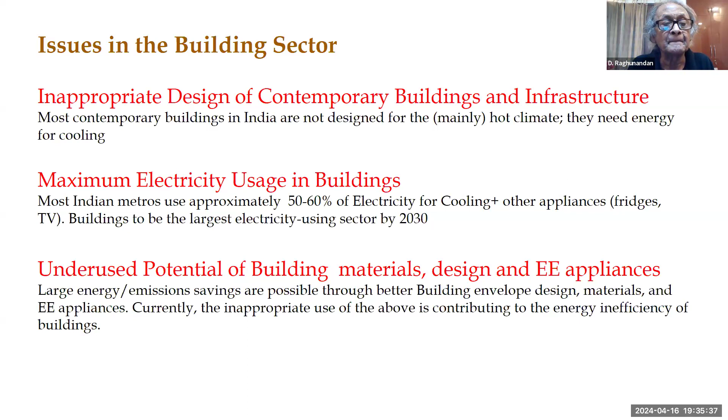I'd just like to speak a minute about this. There is a very important feedback loop that takes place between urban heat and the use of appliances, especially for cooling, inside buildings. We all know that in cities, the urban built structure, buildings, roads, and other infrastructure absorb heat and re-emit it into the ambient environment of the city, which leads to what we call the urban heat island effect.

Now, the hotter the city gets, the more you need to use ACs or other cooling devices. But the more you use ACs, the ACs exhaust heat in exchange for the cooling that they do, which adds to urban heat. And the more the urban heat goes up, the more you want to use ACs, which drive up your UHI even more. So this feedback loop takes place, and we need to be conscious that reduction in energy used for cooling inside buildings not only helps save energy, it also helps reduce urban heat in the city and improve livability there. Next, please.

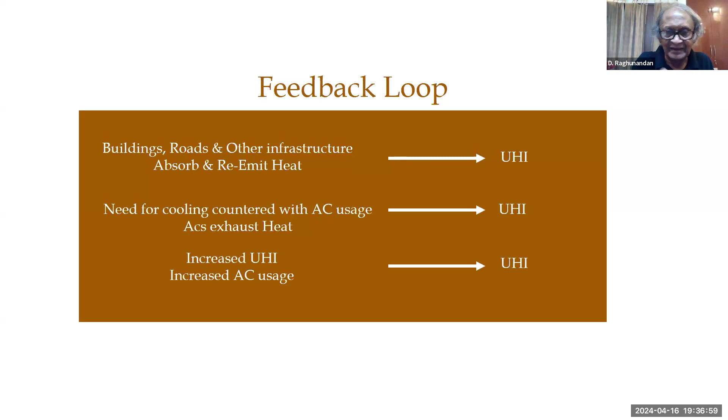So saving energy and emissions, as we have been discussing, has different aspects, embodied as well as operational. The regulatory systems are really not yet mature enough to get into this. Those who are doing it voluntarily, fine. Gradually, we are moving towards mandatory regulations, particularly for commercial buildings. But any kind of mandates or strict regulations in residential buildings is yet to see the light of day, which may change in the coming year or so, to broaden the scope of the building regulations as well as to make sure that compliance is required rather than voluntary as it is now. Next, please. Chitrakshi, next, please.

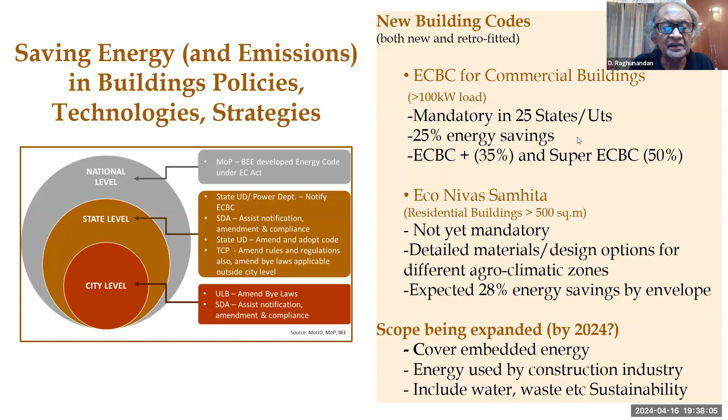So there is obviously a big growth in the building sector, both residential and commercial. We don't have numbers for it, but there's going to be a huge demand in Chennai city, for example. It's expected that apart from residential expansion, which is taking place at more than 10% per annum cumulative growth rate, commercial and office buildings are also growing at an explosive rate, given the kind of industrial growth we are seeing in and around Chennai and the greater metropolitan area.

Emissions from buildings in Chennai are about 57% of total emissions inside the city. And I'm only talking about operational emissions here, not even embodied emissions. Out of that, residential is about 31%, and I'm not looking at LPG and cooking gas. Commercial buildings are about 26% of the total. So the big challenge is that you've got easily more than half the emissions in the city coming from buildings, but we are not yet taking major steps to control those. Next, please.

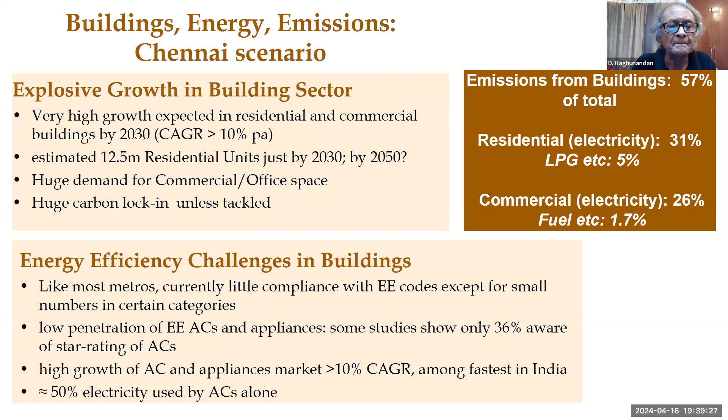Yeah. So this is a huge problem. It cannot be sort of wished away or pushed back, and the need is for policy and tactical solutions. How do you implement what you want to achieve? Next, please.

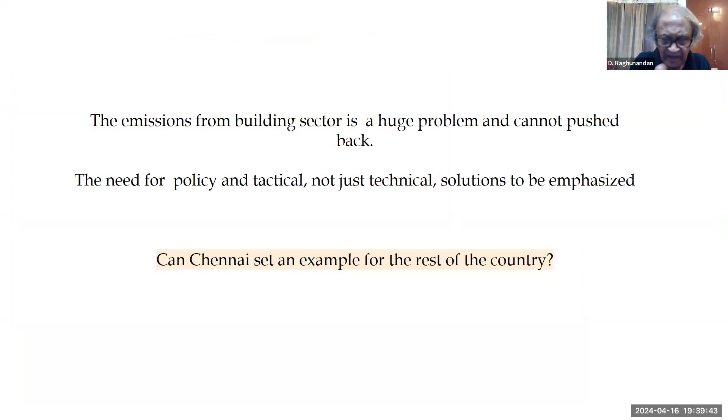Yeah, so what we have proposed in our study, I'll run you through those very quickly. The first is with regard to building envelopes. The Chennai Climate Action Plan has proposed targets in which they have combined retrofitting as well as new buildings. And they have set some targets, which you can see the numbers there. We feel that perhaps this is not particularly wise from an implementation point of view, that firstly, we should look

at commercial and residential buildings separately, because your implementability is different, compliance with regulations is different, and we also should look at new buildings and retrofitted buildings differently, especially in the residential sector, for example. If retrofitting involves fixtures and lighting, etc., that's easier. But if it involves changes in the envelope, that's not easy to achieve at all.

So therefore, I think the strategy for implementation needs to be segregated in commercial, residential, as well as new and retrofitted. That needs to be looked at. And new buildings clearly will be able to give you better energy savings, because all the aspects can be taken care of, including the design, envelope, etc. And the co-benefits achieved from this would be lower urban heat, lower power demand, as well as a win-win for builders, etc. I'll come to that. Next, please.

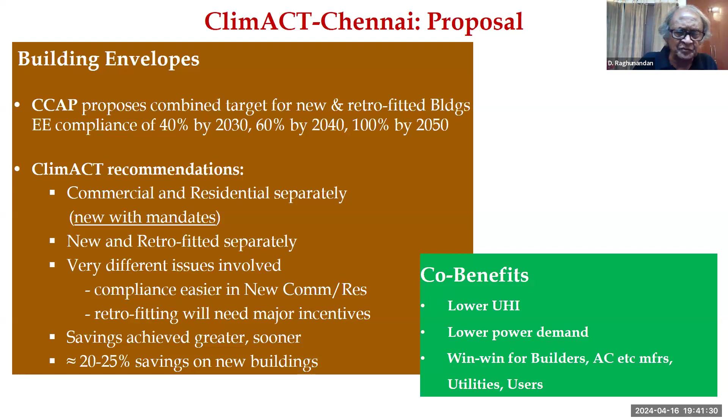Yeah. So now I'd like to look at the ACs and other appliances. We haven't looked at that so much. We've taken for granted that these efficiencies are easy. You look at 3-star, 4-star, 5-star, you put them in and you will achieve that. However, we feel that actually the amount of energy savings and emission savings from air conditioning is quite underestimated. The Chennai Climate Action Plan has estimated something like a 3% saving on emissions from energy efficient ACs. Now, we think this is a fairly gross underestimate. We think it's closer to 10% overall.

And therefore, if you have estimated properly, there's an incentive for a much greater push to energy efficient ACs. For instance, you can have mandates for new buildings which say, this is the minimum efficiency your air conditioners should have. Something else that has happened, for example, in Delhi is the electricity distribution company is offering discounts and incentives to all residential building owners, saying, we will replace your air conditioners with higher star rated air conditioners. We will help you with refinancing by building the EMI into your electricity bill.

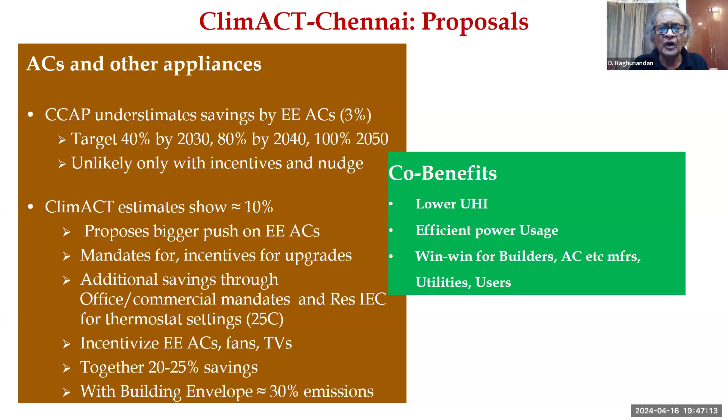Second, of course, there is efficient power usage in this, which is going to become significant. Today, it's thermal power. Tomorrow, if you replace it by solar, there are challenges within that as well. So the lower your power demand, the better it is going to be. And as I said, it can be a win-win for builders, for appliance manufacturers, for users, and for utilities in that. Next, please. So I will close my brief presentation here.

I think what we have done through our study is to explore these options and to highlight the benefits obtainable through improvements in building envelope, shift in building envelope, particularly in residential buildings. Commercial buildings are likely to follow their own logic, likely to comply with norms sooner than residential buildings. Governments also may hesitate to enforce norms on residential, but all our estimations show that the payback period

through energy savings and therefore on your expenditure on this will pay back within a not very long period of time. Anywhere between 5 to 7 years is roughly the payback period that we estimate, which is not much, which will save you a lot of emissions and a lot of energy and improve livability in the city through lowering the urban heat island effect. So I'm going to stop there.